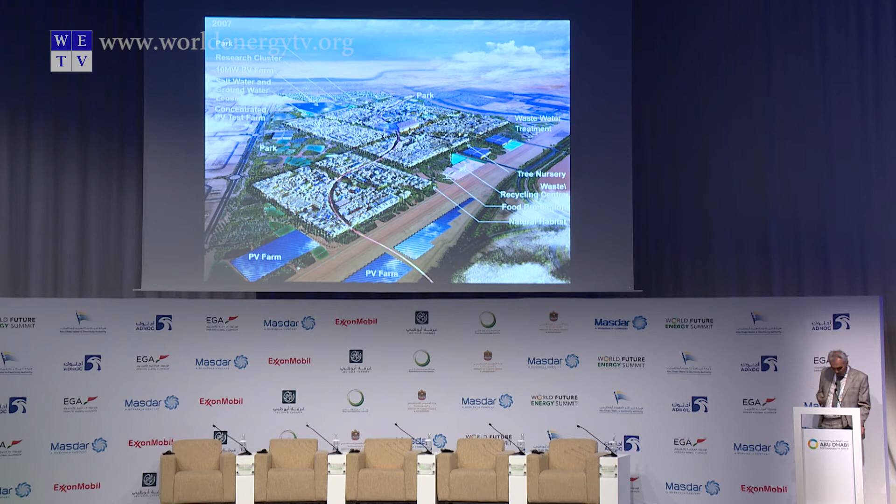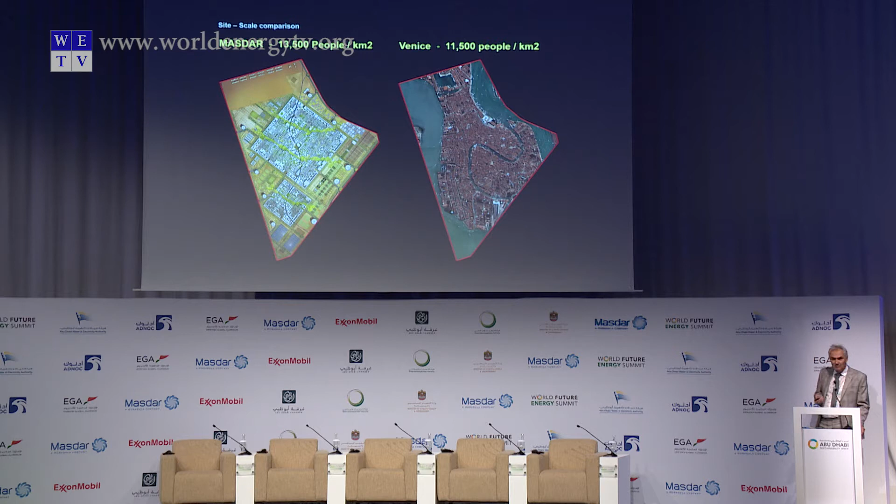You can see that in other cities, for example Venice, where Venice is supported by its rivers, by the canal, and how that relates to the people and the population that lives there. That's something we've been doing a lot of work on recently.

And that is, of course, supported now by new technology, and lots of people have focused on the new technology, whether it be the photovoltaic cells, the smart metering, the PRT systems that are available.

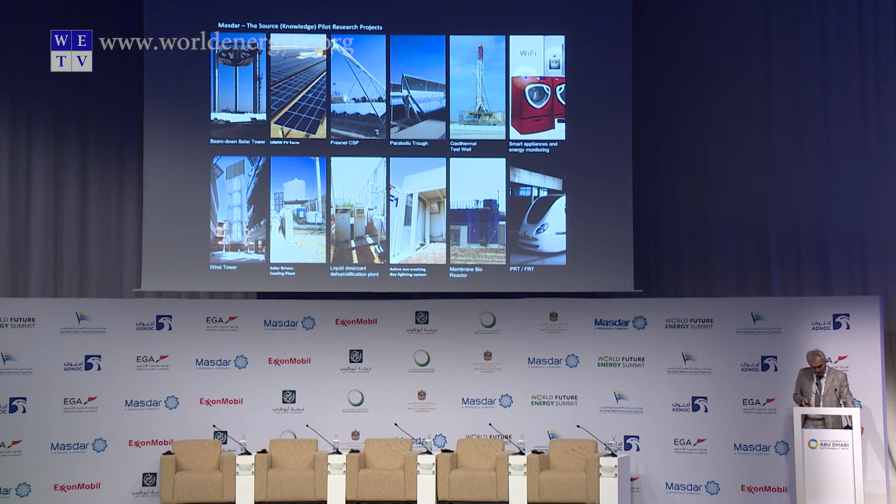But actually, the PRT system in Masdar, when we did this, the first autonomous cars, 13 autonomous cars running around Masdar, 10 years ago, nothing existed. Now it's all absolutely in the media every day.

And it's really that which produces, if we can solve these things, if we can begin to think about how people interact with the environment and how the environment interacts with people, we get better environments and better places for people to live, and the technology then enhances how they're living.

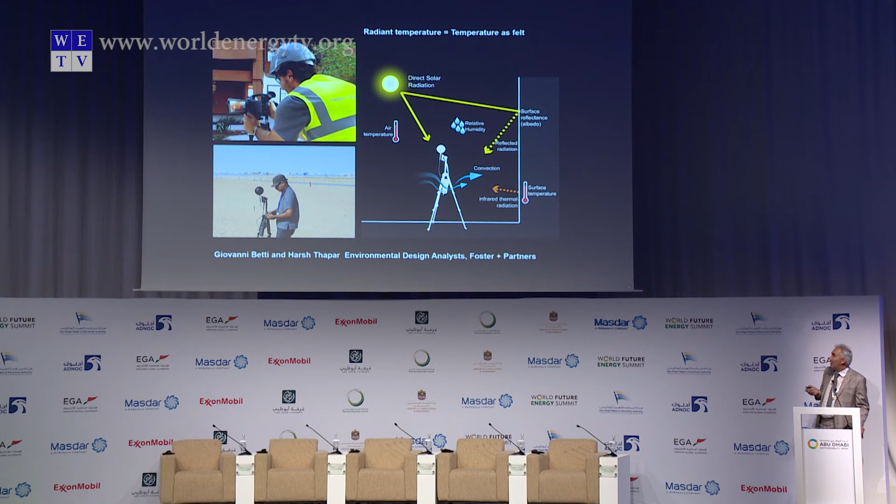And what we've shown at Masdar, these are tests we carried out looking at radiant temperatures at Masdar. What you can see is on the same day, in Abu Dhabi versus Masdar, the radiant temperatures are massively lower because of the urban environment we've generated from the planning of the city.

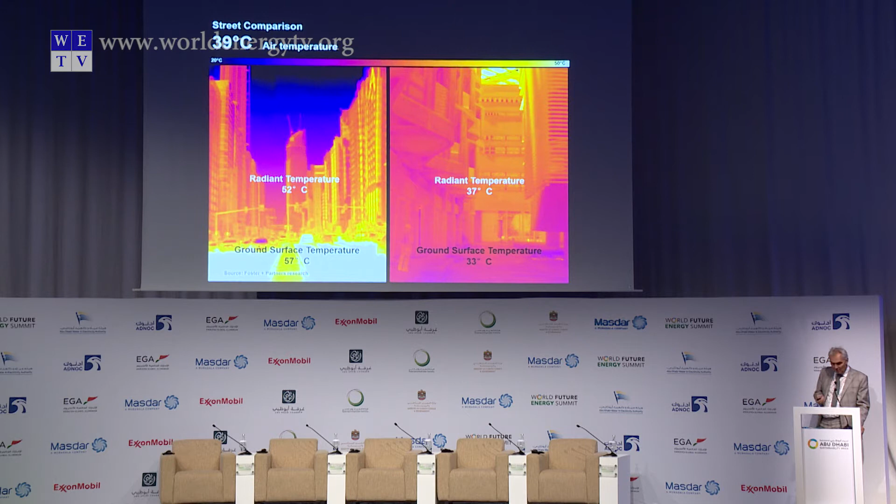What has happened in the last few years is we've seen a growing number of developments, and we've been approached for developments across the world where developments are getting larger and larger. The question we had was: what size of development do you need until the infrastructure begins to meet the requirements of the development? When does it become economically balanced? Because it's the economics of a development that is critical for it to be a successful model.

What we believe and where we've concluded is that developments are still too small. What we now believe is probably you need a development of around 200,000 in terms of population in order to begin to kick in the level of infrastructure needed to make economic sense of these developments.

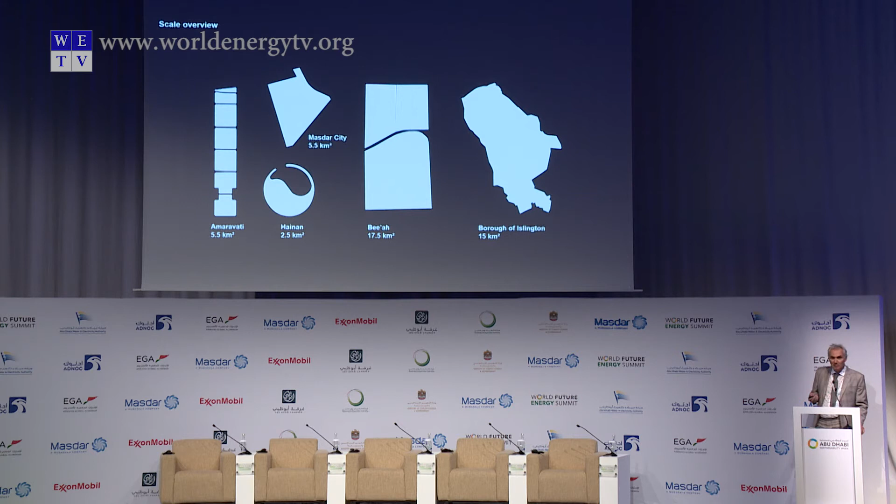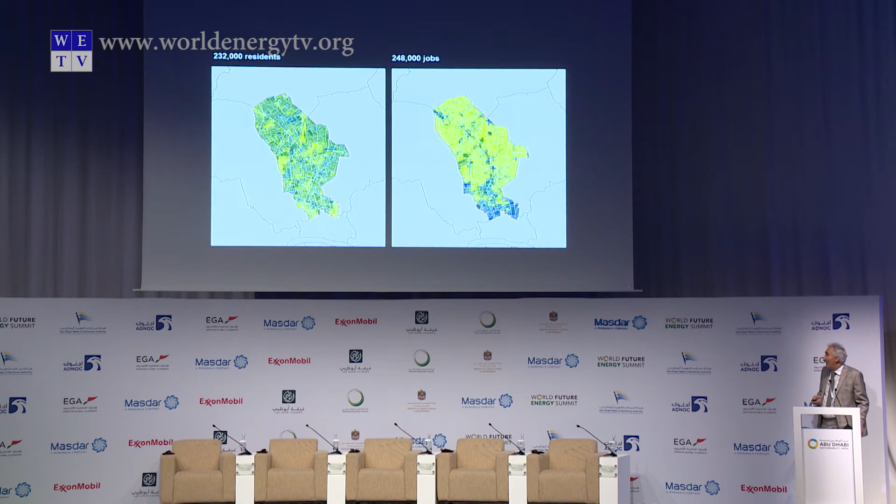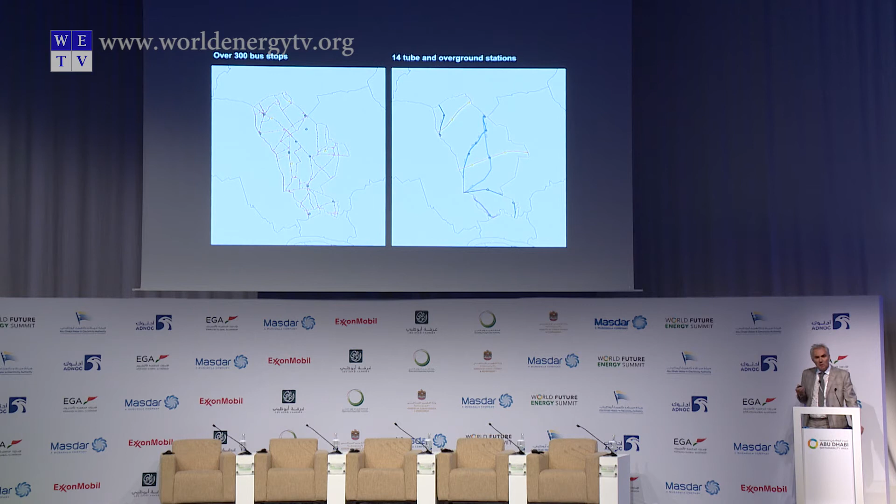Interestingly, we looked at the London Borough of Islington, because we thought: how does a borough sustain itself, what numbers of population? When you look at London boroughs, you find this magic number of around 200,000 population. When you start to look at job generation, residents, the number of schools, the number of doctors, and the infrastructure that links all those things together, you begin to get something which is economically viable for a borough to run.

What that means is that when you look at those numbers of people in relation to the systems you can then implement, once you get to 200,000, you begin to get economic advantages from waste-to-energy, from renewable energy, from systems which make sense financially and which sustain the developments. So the conclusion was really: you need to be over 200,000 population if you're going to make something sustainable.

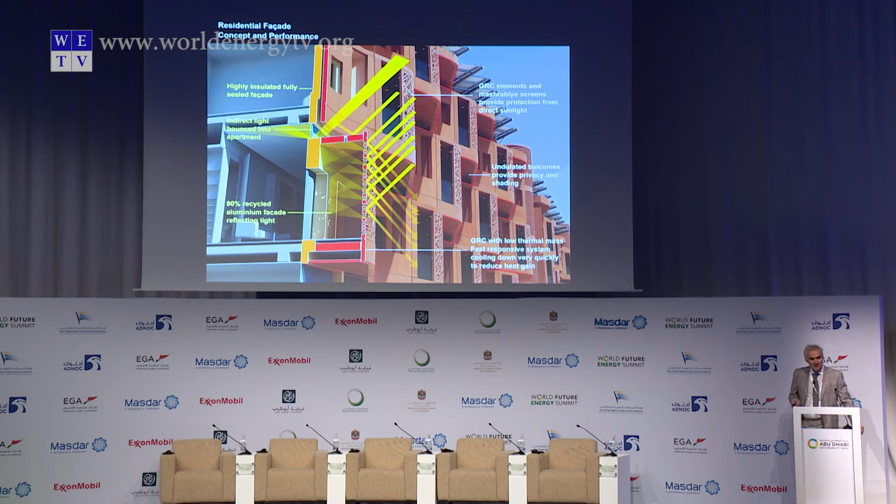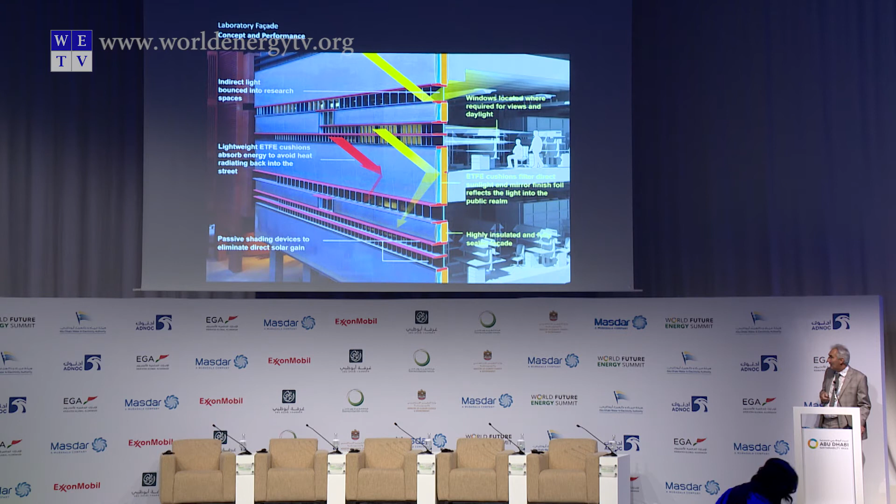Moving on to our next subject, the fabric of the buildings. Going back to Masdar, Masdar started something which was to say the buildings were not generated from an aesthetic architecture point of view. The fabric of the buildings, the way in which the building elevations were generated, was really from the function within. They have different functions within, and different elevations are generated because of the way in which they're working thermally. That is going to be very important. That is the thing generating the architecture, the thing we think we should focus on as we go forward.

It also raised the dilemma: do you put your renewable energy on your buildings, or do you take the renewable energy off your buildings? Our conclusion between phases 1A and 1B of the Masdar Institute was actually to take the PV off the roof and do a 10 megawatt solar plant, because it was easier to maintain, easier to clean, easier to run. So our view is that utilities run better separately than combined with buildings. And if you get bigger projects, you get the ability to separate your utilities out and get efficient utilities. That's been shown with the development here of Shams 1, the 100 megawatt solar field that followed.

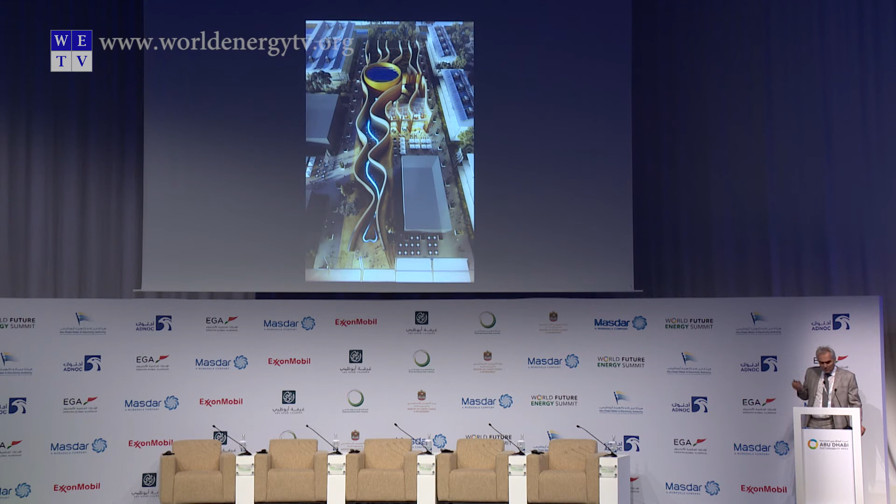Two years ago in Milan, the UAE's pavilion really focused on how to move the building, how to deconstruct it and move it back here. So the building in Milan was a building under deconstruction - it's difficult to know whether it's under construction or deconstruction at the time - and now it's back today in Abu Dhabi at Masdar. Within the next few months, it'll be back up as the new visitors centre for Masdar. So we can give our buildings longevity, whether they're in one country or another - it's all possible.

In Dubai, we've started looking at another project: the new design district, the creative community. What we've been looking at is a componentized system in which people can begin to create the environment they live in. We create a framework environment with a basic modular system, and that system can be adapted and changed as inhabitants move in and as the creative environment changes and builds. And of course, all of this is also designed for deconstruction - all prefabricated, all off-site, and all assembled on-site.

With pre-construction, 8 years ago in Abu Dhabi we tried another experimental project. This was a project that Foster & Partners led ourselves. The question was: could you build a home that would last, that was manufactured, and could we build 1,000 homes in a year with higher performance and higher ratings?

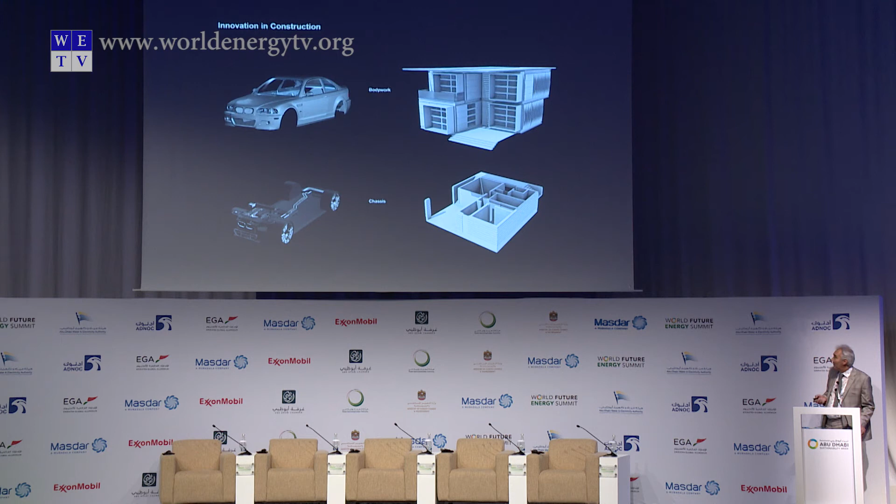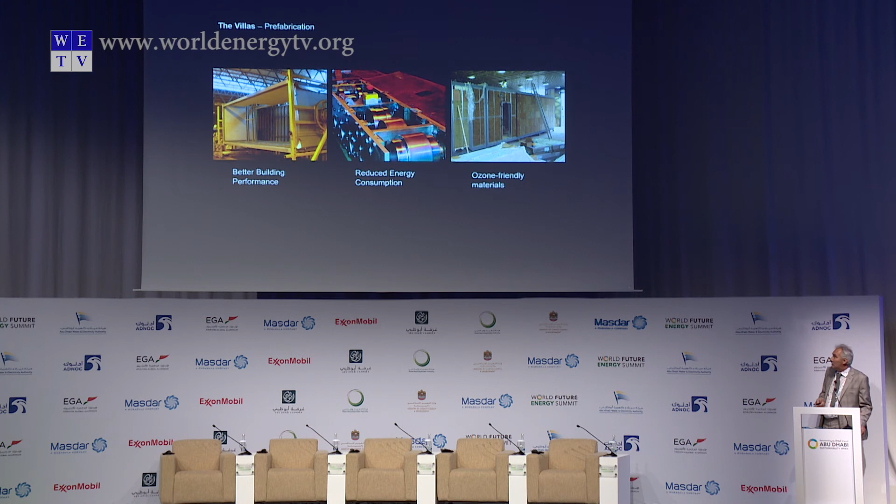So we looked at off-site construction and prefabrication, and we assembled this home, which is just outside of Abu Dhabi in the desert. This is what it looked like when completed - it took 56 days to build, and this was completed 8 years ago. That's what it looks like today, and it's had pretty well zero maintenance over the last 8 years.

You can see from the images that if you build in the right way, off-site in factories, you can get a better finish, a better building, and you can also get longevity. That building can also be taken apart - it can be totally recycled, everything separated out, and it can go back into the grid of materials.

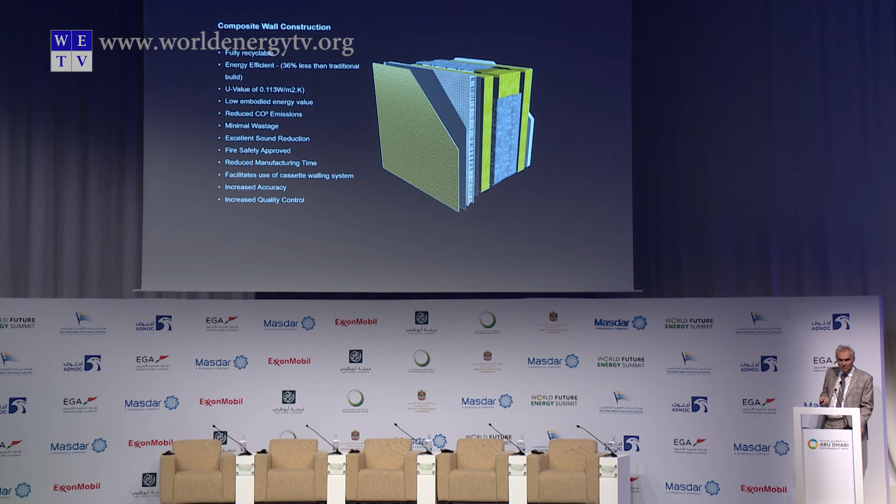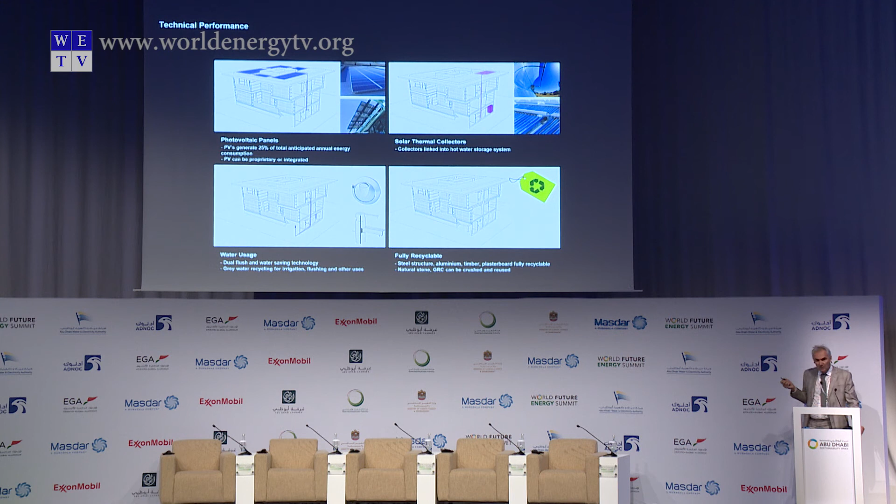Is it sustainable? Yes, it's a super high performance building. All of the technical systems on it would give you, in Abu Dhabi, we believe, a five-pearl building.

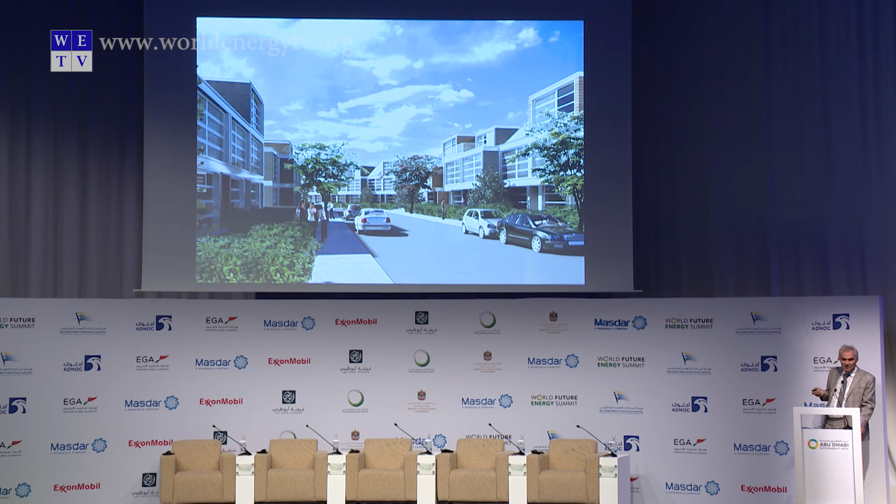What we did was also look at the building further. We took the principles of that process - using exactly the same components and thinking - but now in Panama, where we explored it more, starting with low-cost villas, moving up to terraced housing, and then into multi-use buildings, offices and residential apartments. And in Wales, low-cost housing - this is a terrace scheme in Ebbw Vale, Wales.

The message from all of that is that we mustn't forget the past - the past and the present are both important to bring through, and passive systems need to be put back into the buildings. Yes, we can engineer buildings and produce a perfect environment inside, but if we don't remember the past and the passive systems, we lose this balance between nature and architecture.

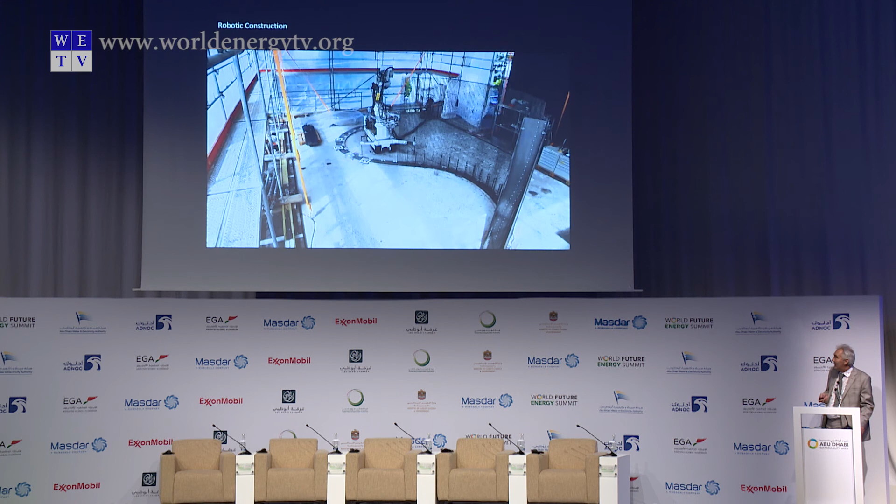On the moon, we're working with the European Space Agency, looking at laser sintering. On Mars, we're working with NASA, taking laser sintering another step forward in terms of habitation of the outer planets. 3D printing, we believe, is something that needs to be explored, and we're exploring it in more detail - robotic creation and fabrication of elements for construction.

There's a study being done in London, connecting up to in-house systems, then recharging and using that recharge in the office space, tying the vehicle and the building together - the idea of creating a city that is totally integrated in terms of its design and engineering.

So what's the future? Well, I think the future is that we've got a new audience - the children are the new audience, and these are all questions that we should move on to. Thank you.